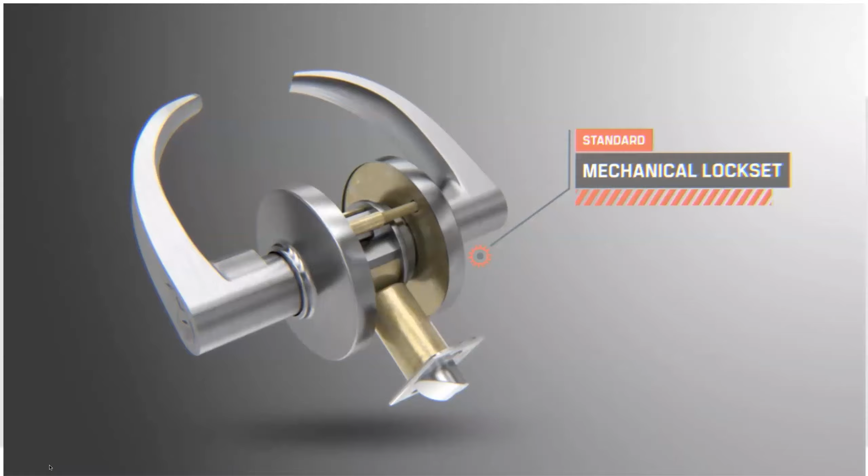We all know what a standard mechanical lock with an interchangeable core looks like. They're installed in buildings everywhere. We also know that a building filled with mechanical locks requires managing an extensive system of physical keys. Keys that get lost, copied, or simply walk away when an employee does.

And that leaves you to rekey or replace not just one core, but sometimes dozens. Replacing every lock in your building with electronic locks would eliminate rekeying and give you greater control. But equipment and installation costs can make the move to digital impractical. Introducing SwitchCore by Best, with technology that delivers access intelligence to the core and makes mechanical SFIC equipped locks digital. SwitchCore is the world's first small format digital core.

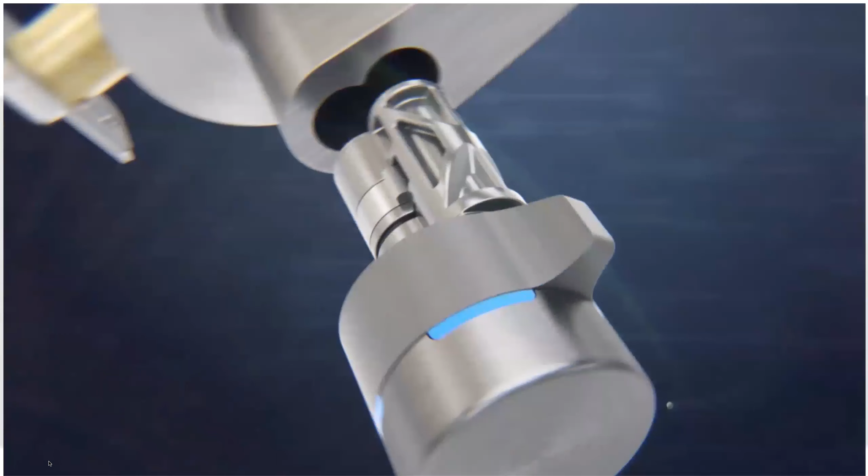It uses mobile credentials, fits cylindrical, mortise, and other SFIC equipped locks, and effectively replaces physical keys with a mobile credential or fob. With SwitchCore, mechanical locks can be made digital instantly and integrated into your existing access control system without adding costly infrastructure. SwitchCore gives you the benefits of intelligent control by door and user, assigning permissions, controlling access, recording entry times, and more.

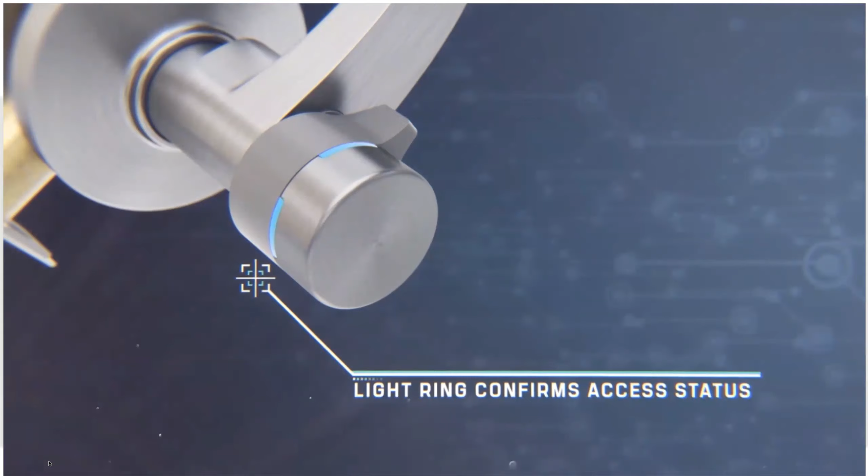SwitchCore uses a proven, secure Bluetooth protocol from a mobile app or fob to grant access. The user touches the knob to wake the core, twists as you would a physical key to unlock, then opens the door. A red light indicates if access is denied.

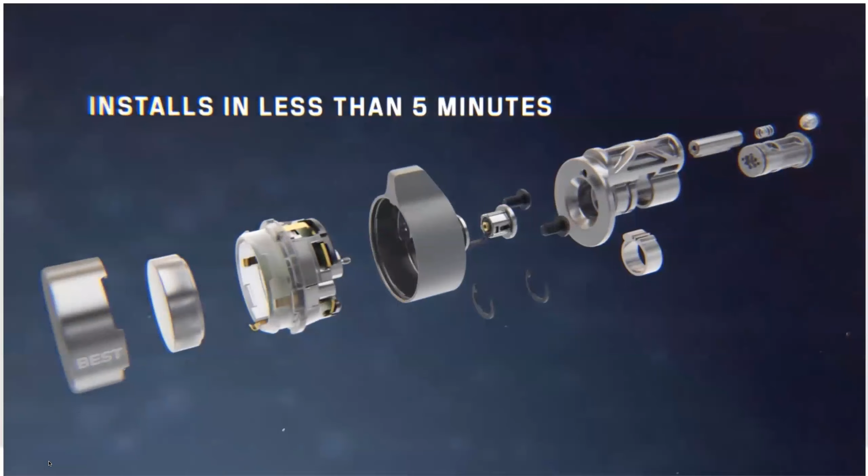Most SFIC-equipped locks can be changed to SwitchCore easily and affordably. There's nothing to wire, no gateways to add, no door hardware to install or upgrade. Simply count the number of doors you want to convert. SwitchCore makes switching from existing key systems fast and affordable, enabling digital access in more places than ever. SwitchCore by Best. It's mechanical, made digital, and it's coming soon to locks of every kind, everywhere.

Now, during our research and development of SwitchCore, we spoke with many national retailers about their internal threats. One told us about an estimated shrinkage that they were experiencing, which equated to upwards of $20 million per year across all of their locations. It was occurring where employees had access to a single padlock with a physical key. Now, how much did that key really cost?

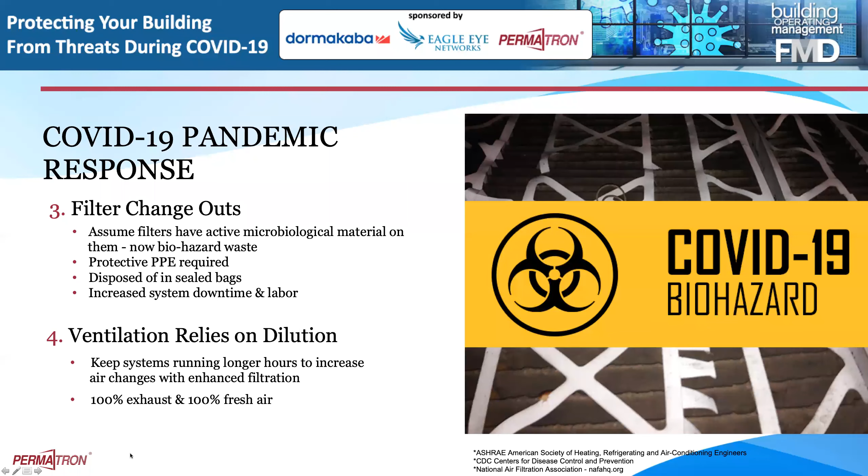So restricted airflow from environmental debris is a major problem for HVAC equipment. I think that this is often overlooked. People have a tendency to focus on the filtration of the air once it enters the building. What we really want to look at is what we're doing to the air as it's getting into the system.

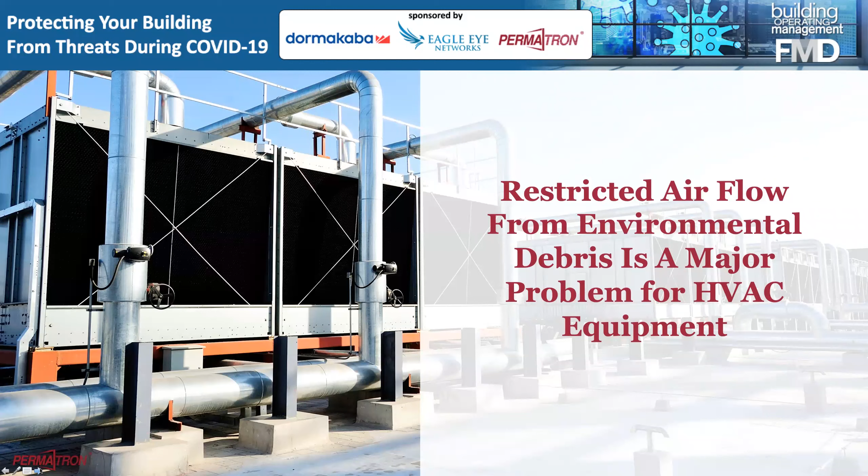When your coils are clogged, you're going to see longer cycle times that reduce capacity. You're going to see higher energy consumption. You're going to see higher temperatures. You're going to come into contact with costly repairs, maintenance, and downtime, and you're going to shorten your equipment life. As everybody on here knows, the rooftop equipment and your HVAC equipment is very, very expensive. And one thing we try to do is make that equipment last as long as possible.

What is it costing your facility?

According to EPA research, 0.042 inches of dirt on an AC coil can reduce efficiency by 21%. A dirty condenser coil runs 80% of the time fighting dirt when it should operate at 30% during mild weather. AC equipment operating with dirty coils can use as much as 37% more energy than equipment with clean coils. A 10-ton AC system now only provides 7 tons of cooling. Dirty condensers restrict heat transfer, causing the compressor to work harder. Rising head pressure results in a loss of cooling capacity of 30%.

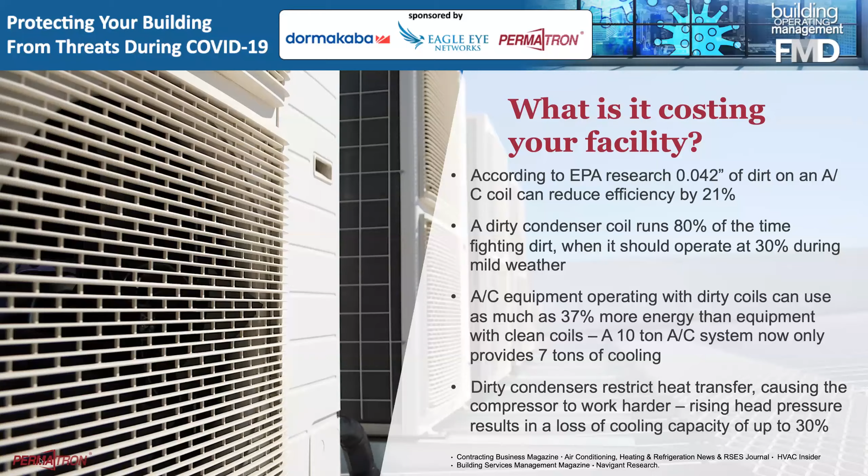Now that we know what the problems are once your coils are getting clogged and you're having trouble with your air intakes, let's take a look at the solution. What we can offer is the PreVent system, which is an exterior air intake protection system. An applied-based filter that fits over your air intake system to stop airborne debris before it gets into your HVAC coils and fins.

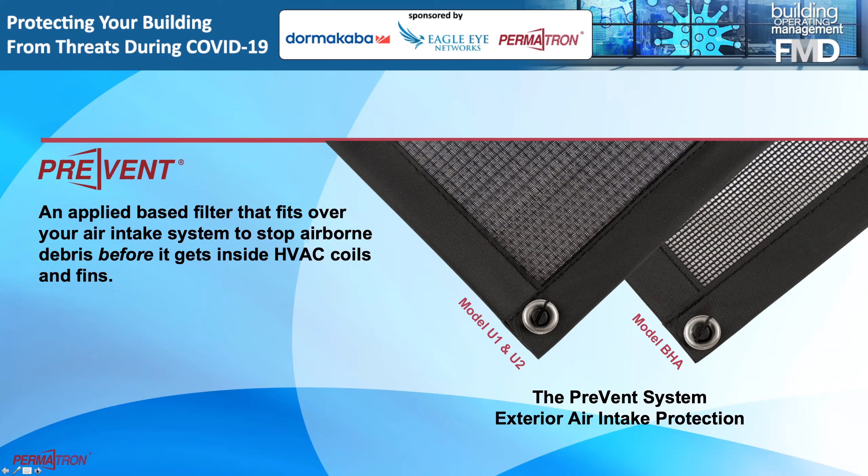The biggest and first question we often get is, the product sounds great, it looks great, how do I attach it to my unit? We have two different mounting options. Our first and most popular is our Magna mount. It's a neodymium earth magnet with a simple, quick attachment. You simply stick it to your unit, slide the grommet over the post, flip the tab down, and your filter is installed. The additional option has the exact same mechanism, but comes with two self-tapping screws. So where you see the rivets in the Magna mount, you would simply see two holes where you'd use two self-tapping screws.

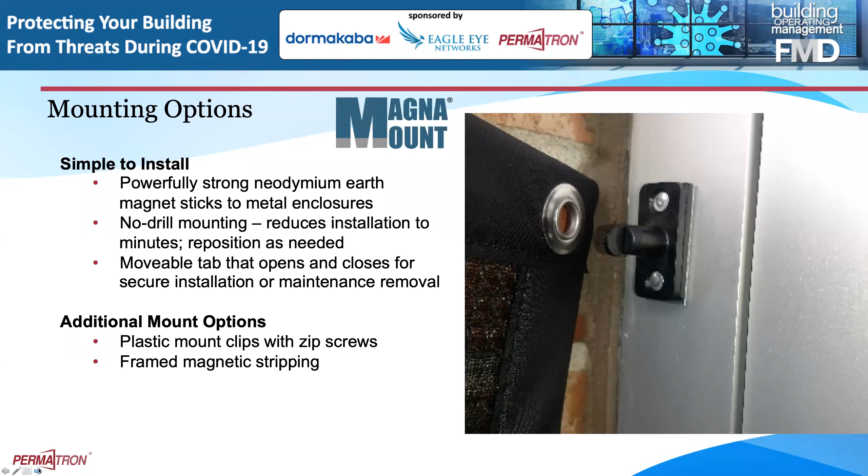The biggest benefit of our product versus not having it is that it's simple to clean. You'll see coil cleaning jobs where coils are clogged up and you have people up there with pressure washers and chemicals, blowing stuff out. You've got 2 or 3 guys running water up there and it's taking them several hours. Ours is simple to clean with a broom or a shop vac.

It also simplifies cleaning hard to reach fins and coils. A lot of times you see guys up on ladders trying to clean the coils, getting up into the hot water basin in their cooling tower. That takes a lot of work to get up there. Our filter works to stop the particulate before it enters the system, sits right on the outside of the unit, and you're able to clean it very easily.

You're also able to clean it in place with absolutely no system downtime. Our product is made to be cleaned in place while your system is running. Large facilities with 100 air handling units can average 200 coil cleaning procedures per year, which really adds up.

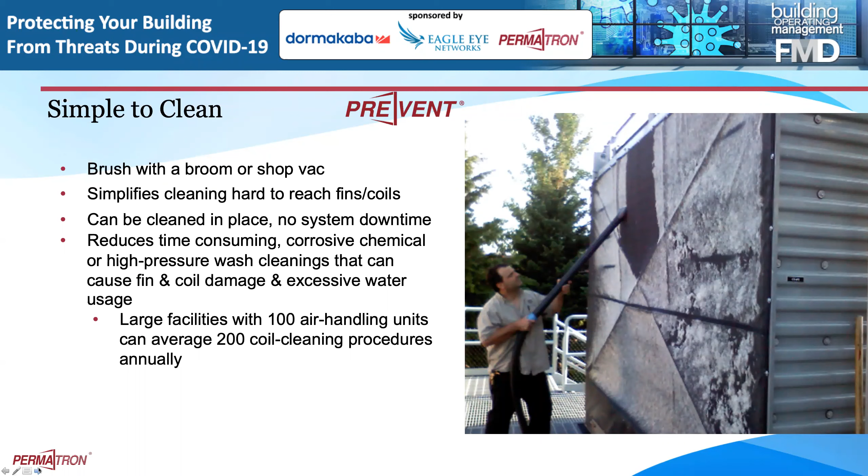So PreVent is simply your best choice. What we offer is custom size to fit all air intakes. I have yet to see a unit that we're not able to provide air intake protection for. All of our products are made in the USA, right in Elk Grove Village, Illinois, about 5-10 minutes from O'Hare Airport. As we discussed earlier, our black media provides UV protection. We're UL classified. All of our products come standard with a 5-year warranty. Extremely low initial resistance, and independent testing has shown that attaching a PreVent filter caused less than 1% change in compressor discharge pressure.

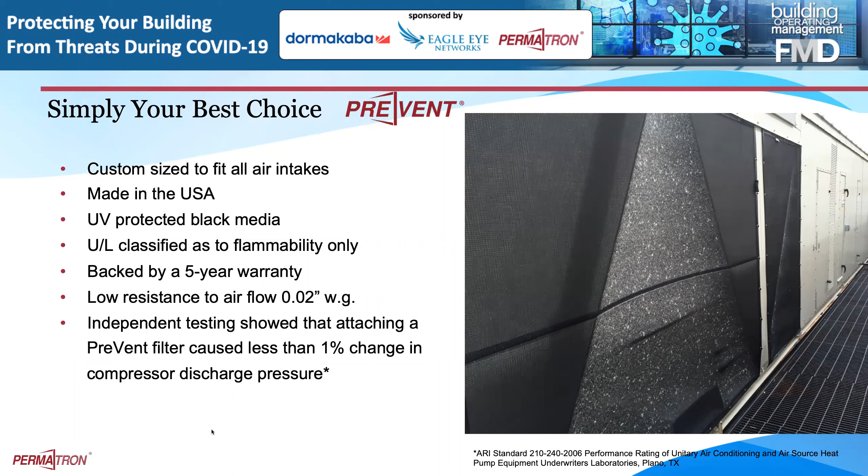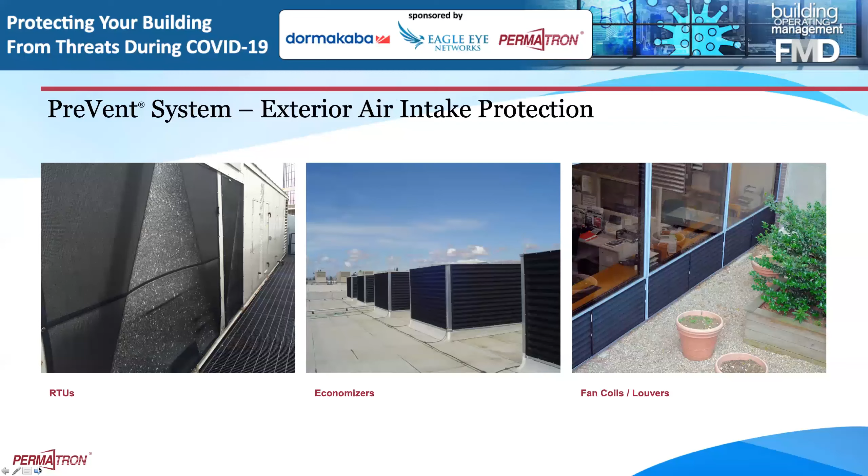Now that we've covered the product a little bit, I simply want to click through some application photos for everybody. I found with our product, especially for people who haven't seen it before, pictures really are worth 1,000 words. On the left-hand side there, you'll see a typical RTU. In the middle, you'll see some economizers. And on the right-hand side, you'll see some fan coils. So whether there's a coil behind there, it's your fresh air intake, we have experience with all applications.

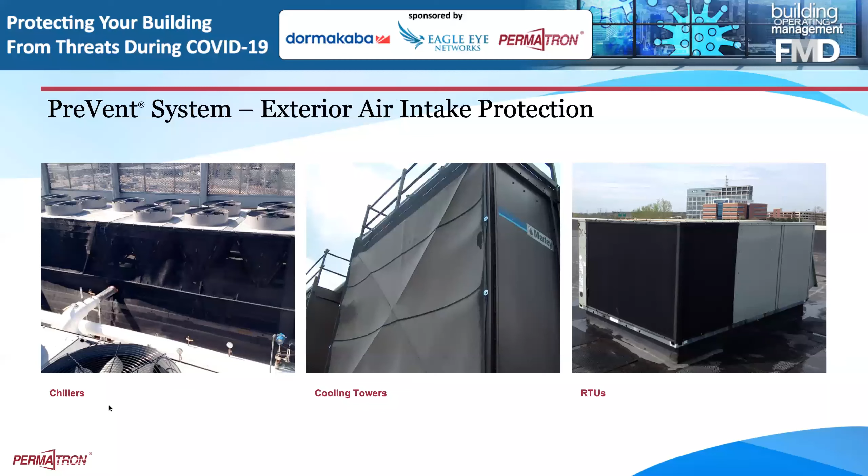So we also work on indoor applications. A lot of times compressors will come with either no filter on them, or people will be using blue poly pads that they have to cut to size, put in there, and change frequently. What we can offer is a permanent solution for your compressor air intakes.

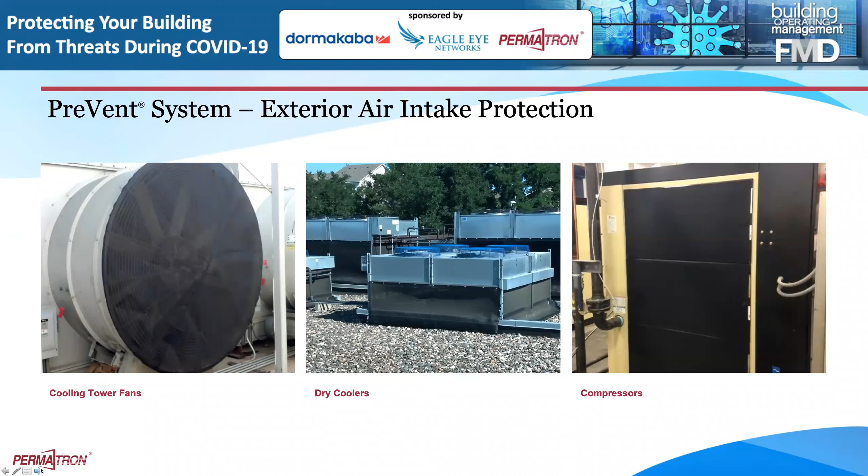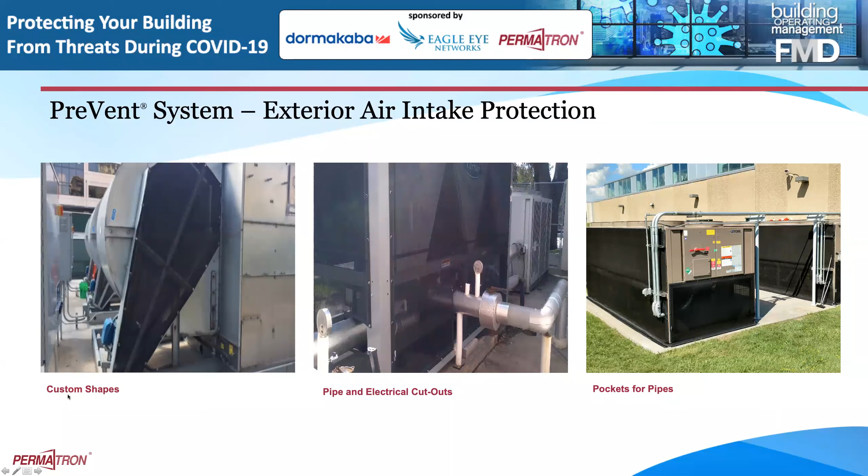So air intake protection, what is in it for you? The 3 biggest things are that you're going to save on energy, save on labor, and save on repairs. Really what we focus on with our product is the middle one, saving on labor. We find that we can show a 1 to 2 year ROI typically just on labor cost alone.

And if you remember what I talked about earlier, our product does have a 5-year warranty on it. So really, what we're guaranteeing you is that you're going to take our product in, you're going to see a 1 to 2 year ROI, and then that product's going to last at an absolute minimum of 5 years. When you break down all the costs, you'll see that once you put our products on there, you get a pretty quick payback, and it's going to make your life a lot easier.

Last product I'm going to talk to you guys about really quickly is our Model IN electrostatic air filters. We've been using this for over the last several years as a replacement for metal mesh filters. What we've come to find in the field is that a lot of people are using metal mesh filters and they don't necessarily know why. Their equipment might have come with them originally, or they might have been using them their entire career, and they don't know that an alternative exists.

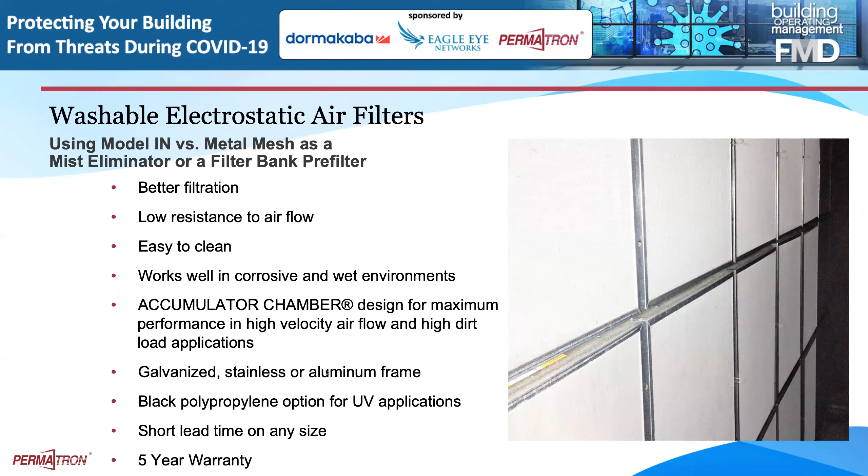A lot of times you'll see these metal mesh sizes, and they might not necessarily be your standard 20 by 20. They might be a 13.5 by 32.5. We can make that for you very quickly. And again, like the rest of our products, it comes standard with a 5-year warranty.

All right, thanks, Dan.